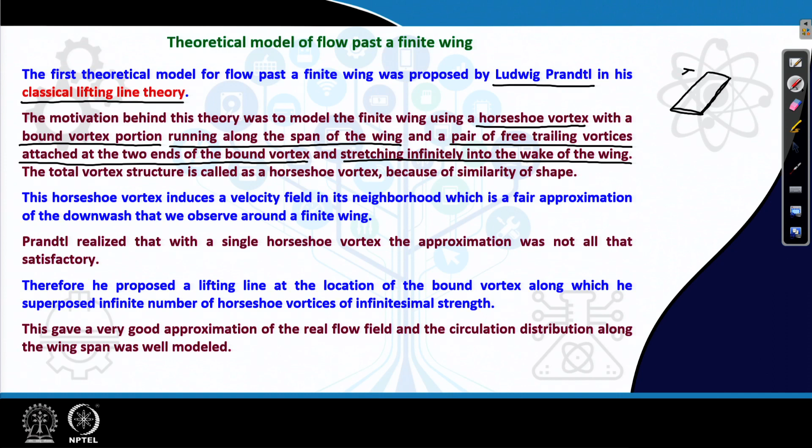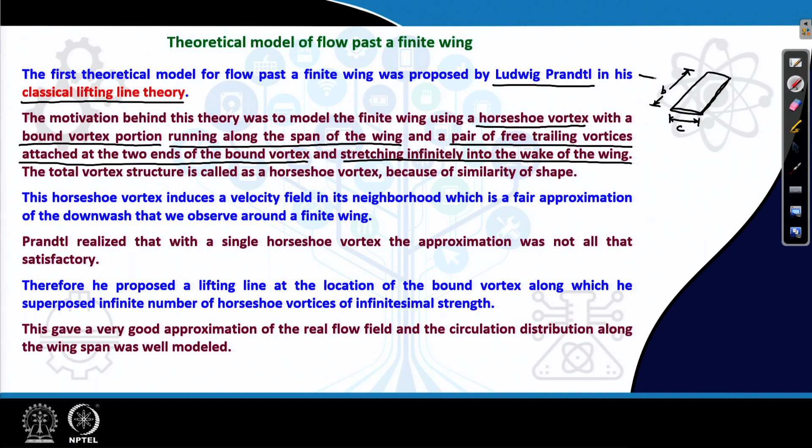This is your span, this is your chord. Let us say you have a rectangular planform. So when there is a flow past this wing, the effect of that flow was modeled by Ludwig Prandtl by using a horseshoe vortex.

Which would look more like this in the context of the wing, but it is just represented in the form of a horseshoe vortex which is present in a uniform flow field, and that vortex comprises of a portion which is along the span of the wing, called the bound vortex, and a pair of trailing vortices.

These are the two trailing vortices forming a pair which stretches to infinity. We will discuss more on this in the subsequent slides. So the total vortex structure is called a horseshoe vortex. Why is it called that way? It is called that way because of its resemblance with the shape of a horseshoe.

So this horseshoe vortex induces a velocity field in its neighborhood, which is a fair approximation of the downwash that we observe around a finite wing.

So Prandtl realized that with a single horseshoe vortex, the approximation was not all that satisfactory. Therefore, instead of using just one such horseshoe vortex, he used innumerable of them. He proposed a lifting line at the location of the bound vortex, along which he superposed an infinite number of horseshoe vortices of infinitesimal strength. This gave a very good approximation of the real flow field, and the circulation distribution along the wingspan was also modeled. So this is the background of the classical lifting line theory proposed by Ludwig Prandtl.

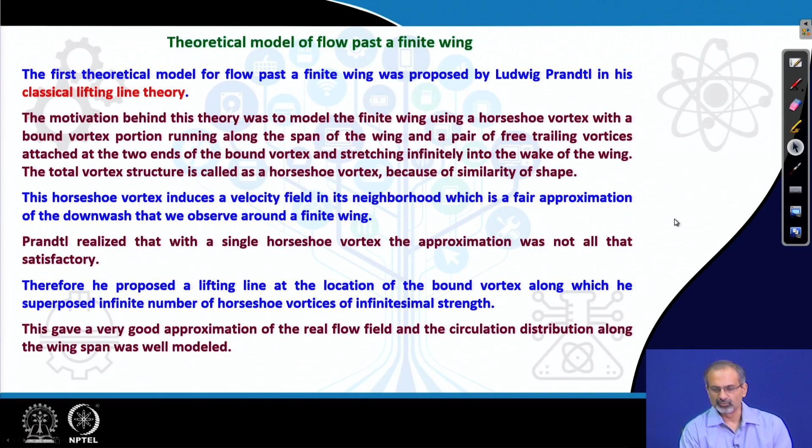Before we discuss the lifting line theory, we need to develop some tools, and those tools come from the concept of the so-called vortex filament and the accompanying Biot Savart law. So let us try to recall what a vortex filament is.

Earlier, we were looking at a vortex sheet. So when we were discussing the thin airfoil theory, we first discussed that we can have a distribution of vorticity along the camber line, and then we simplified it further and said that it can be distributed along the chord line. So there were innumerable discrete vortices which practically formed a sheet.

Now, if you were looking into the plane of this page, then you would see each one of those vortices moving in the depth direction with a particular value of vorticity. So these could then be considered as vortex filaments, which are stretching along the depth direction. So we have drawn such a vortex filament, but which could be arbitrarily curved and has a strength gamma.

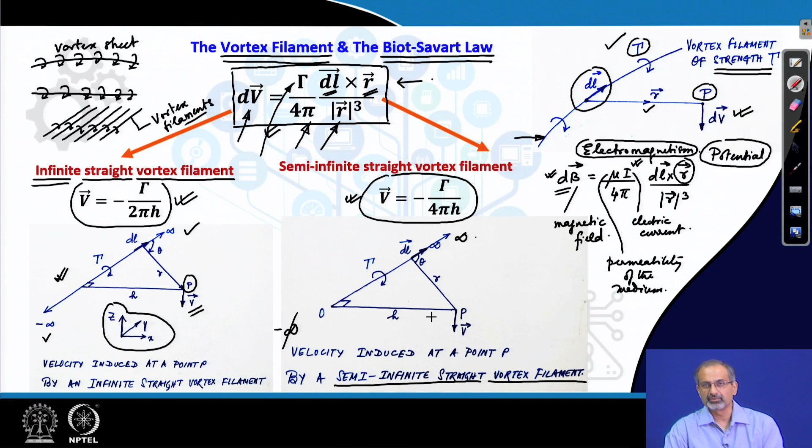This is the axis system that we have marked here, and that is how it works out. Again, try to work this relation out from the Biot-Savart law. These two relations that we worked out are going to be very useful for us. We will use them in due course.

We look at a very important theorem which we call the Helmholtz theorem, and there are two parts to this theorem. The first part says that the strength of a vortex filament is constant along its length. We just looked at a vortex filament, and we need to know that the strength of that vortex filament is invariant along its length.

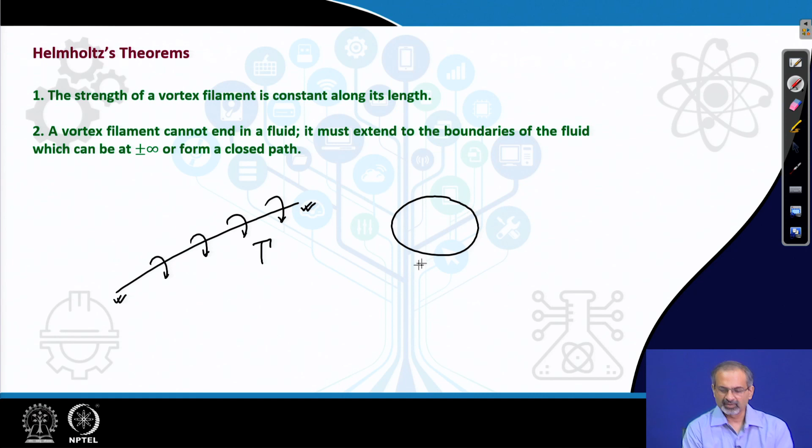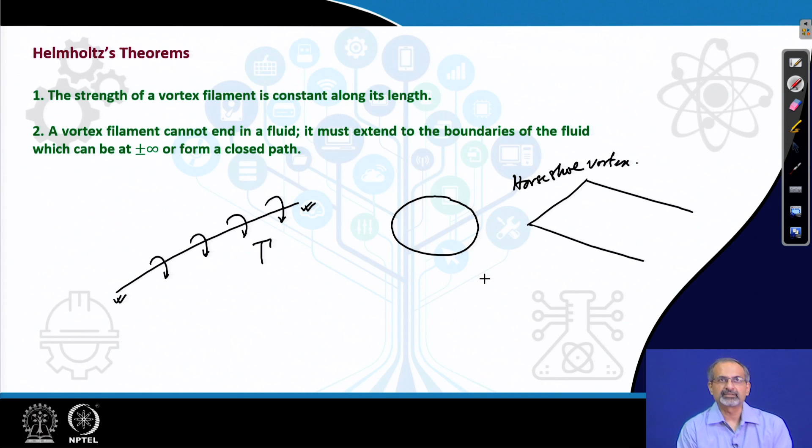The second part of the theorem says that a vortex filament cannot end in a fluid. So it cannot just have finite ends like this. It must extend to the boundaries of the fluid, which can be at plus or minus infinity, or form a closed path. It can also form closed paths like this, or else extend to infinity, like we looked at with the horseshoe vortex for example, but it cannot abruptly end somewhere in the domain. So we have to keep the statements of this theorem in mind as we move on.

Most finite wings have a variable chord, with the exception of a simple rectangular wing, which we had discussed in the previous lecture. We could have, for example, a tapered wing. If a wing has the same airfoil section along the span, but with different chord length, then the wing is said to be geometrically twisted.

For such wings, alpha is different at different span-wise locations. Here we need to say that along the span, if it has different chord length, then it also has the tapering effect. And then the geometric twist comes when the alpha is different at different span-wise locations. So geometric twisting is associated with the alpha changing at different span-wise locations, while having different chord length is associated with the tapering of the wing.

If the tip is at a lower angle of attack than the root, the wing is said to have a washout. So the tip has a lower alpha. That basically means if you look at the cross section of the wing near the root, for a tapered wing, the chord length will be larger, and at the tip the chord length will be smaller and the alpha will be lesser. So it may be like this, or you could also show it in another way like this.

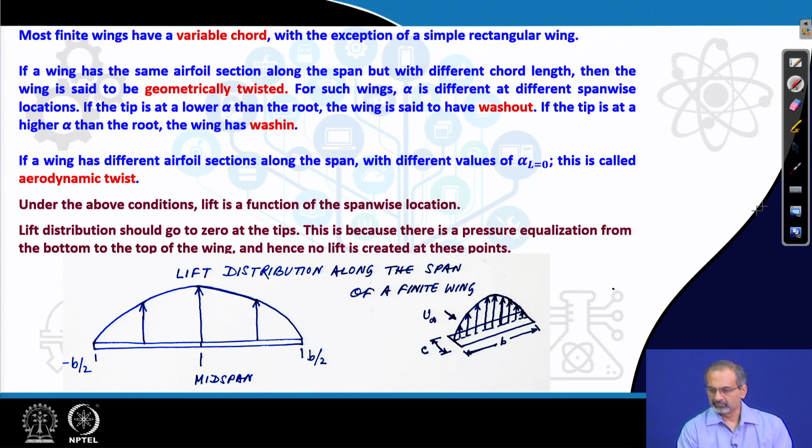Let us look at the horseshoe vortex once again from the perspective of the finite wing. There is a uniform flow impinging on a finite wing of span b, and the mid span location corresponds to y equal to 0. The approximation proposed by Prandtl was that a horseshoe vortex will simulate the effect of the wing.

How does the horseshoe vortex look? It has a bound vortex, which is a straight part spanning the wing, and two free trailing vortices. The strength of the vortex filament does not change along its length, and it stretches to infinity through the free trailing vortices, satisfying Helmholtz's theorem requirements.

Prandtl found that this does not necessarily give a very favorable distribution of the induced velocities in the field. So let us try to derive a relation which proves that point.

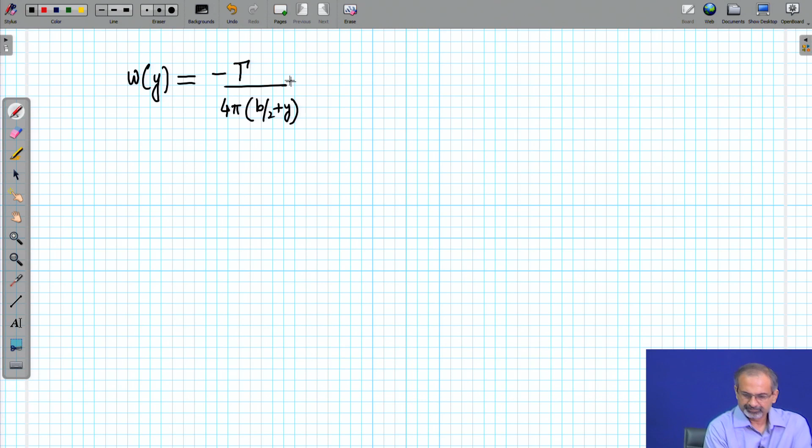If you take any point y on the bound vortex and try to find the induced W at that point, remember that the bound vortex itself does not induce anything at point y, it is only induced by the two sections of trailing vortices. This distance is b by 2 plus y, and the other distance is b by 2 minus y, which you see in the denominator. We are using the expression minus gamma by 4 pi h, because these are semi-infinite vortex filaments that begin here and stretch to infinity.

If you simplify this expression, what you get is minus gamma by 4 pi into b by b by 2 square minus y square. As a consequence of this...

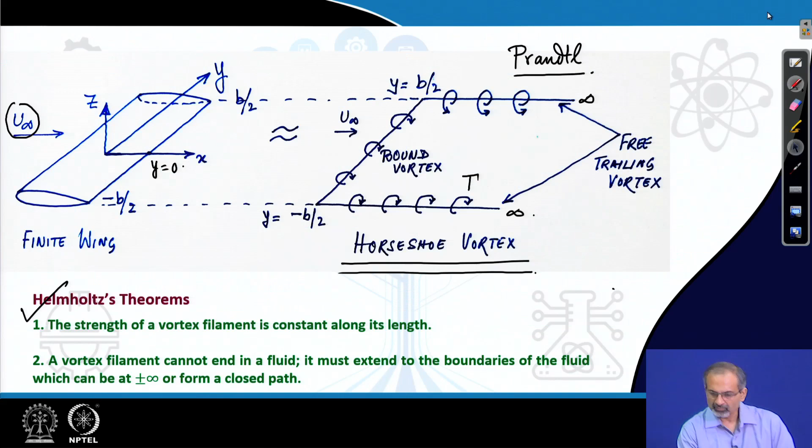Let us see a plot showing how the distribution of the W component of velocity, the downwash, looks with that single horseshoe vortex. The downwash distribution looks somewhat like this, and here it predicts infinite downwash, which is inconsistent with reality. There can never be infinite downwash at the edges or tips of the wing, so this is not a very realistic representation of the wing.

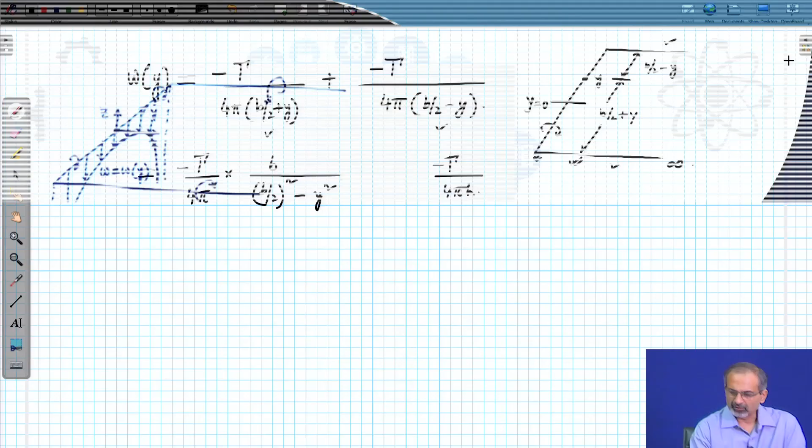Prandtl and his team were perplexed for years before resolving this problem, understanding it required a more pragmatic approach. What they proposed was that there be multiple horseshoe vortices instead of just one. Let us try to see what effect that has.

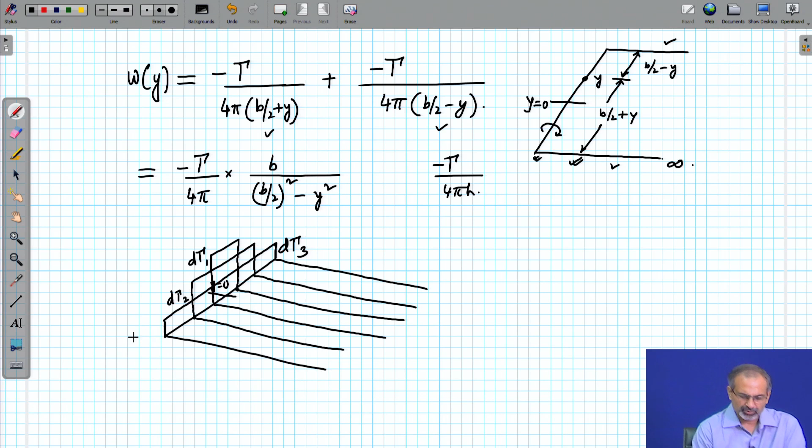Let this be y equal to 0, and let the most outer pair of trailing vortices contribute a little bit of circulation d gamma 3. Then the next inner one contributes d gamma 2, and the innermost one contributes d gamma 1. So the circulation gradually grows as we move inward away from the tips towards the mid span location, because each one contributes to build up the total circulation.

At the mid span location, all these effects sum up. The other thing is that whenever there is a change in circulation along the lifting line, an equivalent amount of vorticity moves down into the wake of the wing, so an equivalent amount of trailing vortex is shed into the wake.

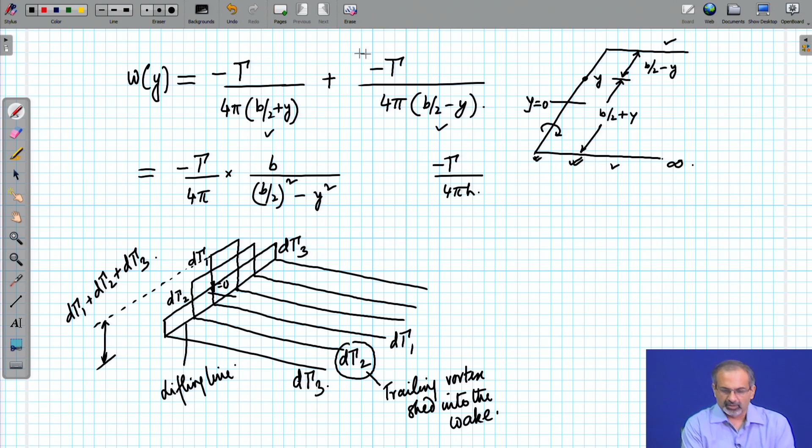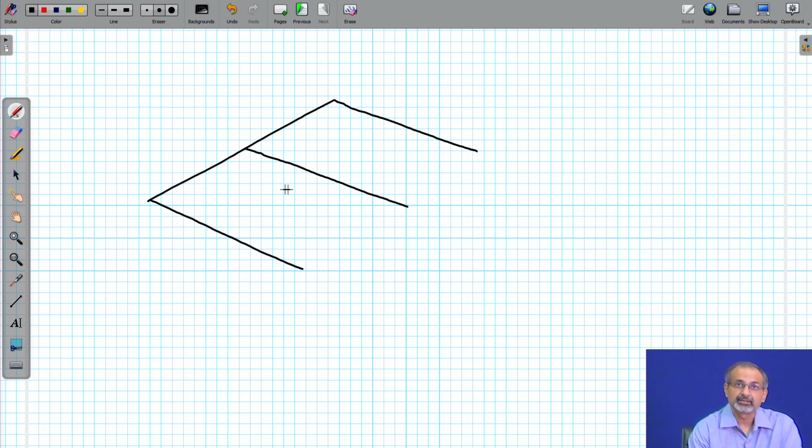They further refined the model subsequently and made it look like a continuous sheet of vorticity instead of having discrete elemental vorticities. That would mean that instead of having stepwise changes in the circulation that is there in the lifting line in the form of the bound vortex, you will basically have a continuous change of the gamma.

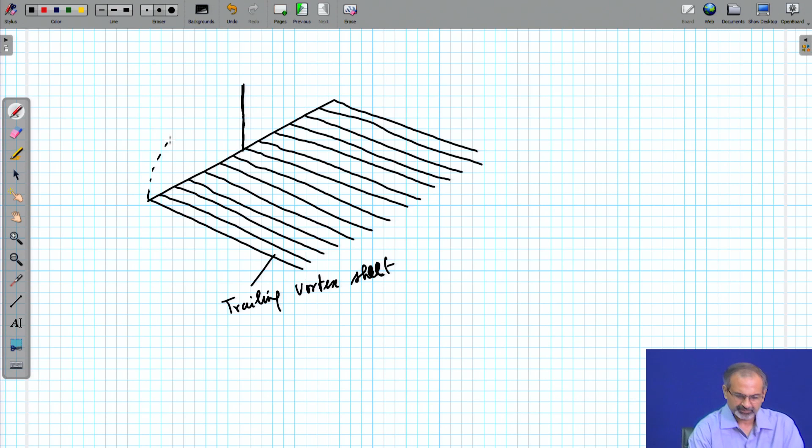So, this is your trailing vortex sheet. When you have such a continuous sheet, the gamma that builds up is very, very smooth. Let us say this is the gamma at the mid span. You can figure out that that will be the maximum value. Let us call that as gamma 0, that is the maximum value.

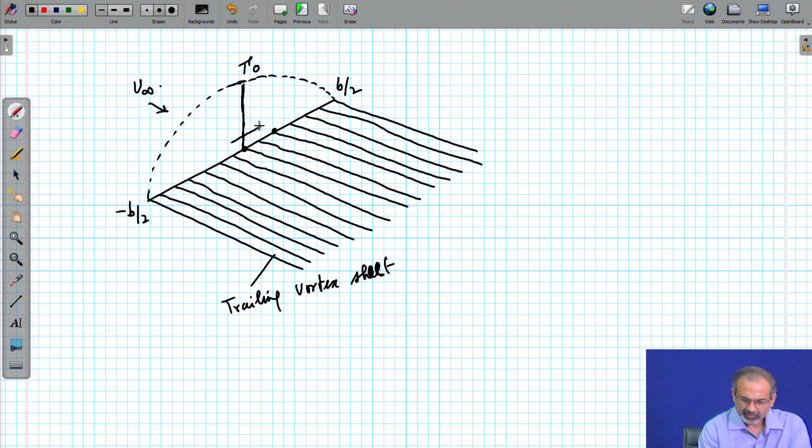Let us mark the ends as minus b by 2 and b by 2. This is the uniform flow which is approaching from upstream, and let us identify a location, say y. So, this is at a distance y and a small element around that y of width dy, let us say this is dy. Let us mark another point, let us call it y naught, where y naught is greater than y here, at least as we have drawn it in this figure.

Then let us identify a small element on the trailing vortex at the y location. Let this be dx. Let us call this angle that is subtended by the line joining that dx element with y naught as theta, and the vector which connects that elemental length with y naught, we will call it as r.

What is the distance between the y to y naught point? That we will mark as, say, you can call it as h, for example. So, this is the h. Remember that this is a trailing vortex which has this sense of rotation and it carries a strength d gamma.

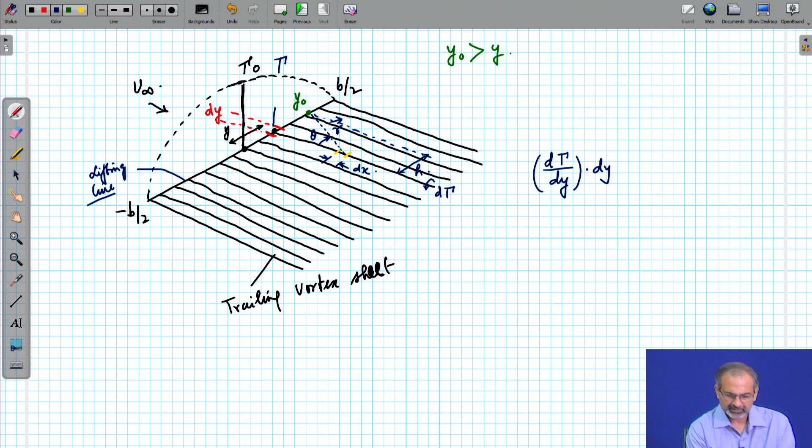By applying the concept that per unit length, this is the rate at which the gamma distribution along the lifting line is changing, we indicate it as d gamma dy. Over a length dy, it will change by this amount. So, that small element that we have marked here, over that length, this is the change in gamma.

And that must be the gamma that is being shed into the wake. So, the velocity that this d gamma will induce at the field point y naught, we will mark it as d w and we will express it this way: d gamma dy into dy. Notice that we have put a negative sign there, we will try to justify that, 4 pi y naught minus y, which we called as h.

So, we are basically using this equation that we had mentioned before. Does it work appropriately? Keep in mind the direction of the trailing vortex. Remember that these are all moving in a clockwise sense, if we look at them, while the others are moving in counterclockwise sense. That is just about y equal to 0, there is a change in the direction.

Now, if you notice carefully, this particular nature of the vortex, it will end up inducing an upwash at the point y naught, because that point y naught is lying to the right of this counterclockwise moving vortex. If it was lying to the left of this counterclockwise vortex, then it would have faced downwash.

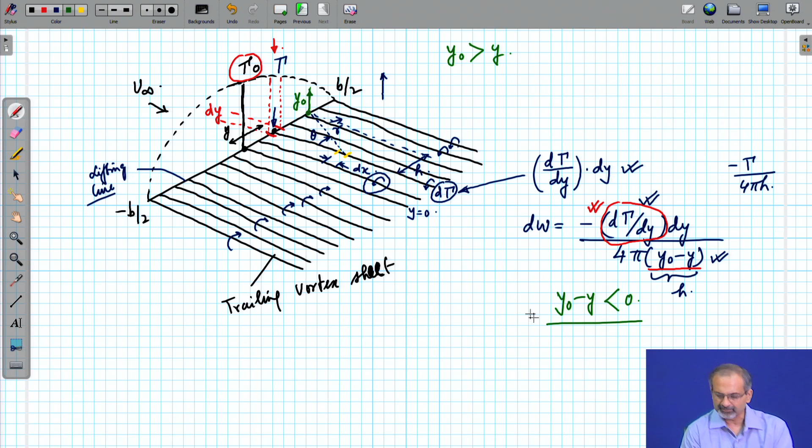What if y naught minus y was less than 0? That means y naught was less than y, to the left of y. In that case, y naught minus y would become negative, and this remains negative. Therefore, the dw will have a negative sign and thereby there would be a downwash. So, this is a consistent representation, that is what we have come to know.

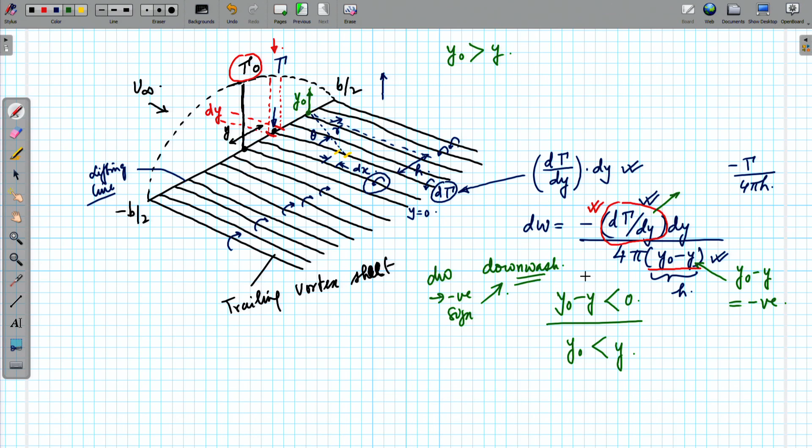So, we are moving towards a model where the downwash distribution will be more appropriately modeled, through a continuous distribution of vorticity, trailing vorticity in the wake of the wing, and thereby there would be a gradual change in the gamma value along the lifting line. That means, the bound vortex strength will change as a function of y.